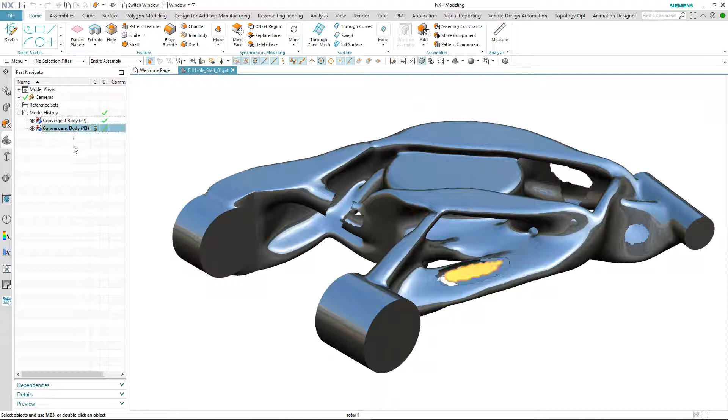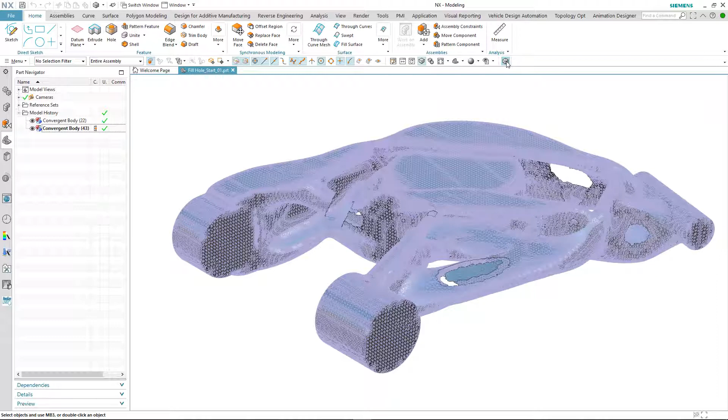In the graphics window we have an imported mesh body that's come in as two separate convergent bodies. We can also take a look at the makeup of the facet geometry by highlighting the facet edges. This visual aid is particularly useful to highlight areas that might require a remesh to improve the mesh quality. In this instance, the mesh density looks decent, so there'll be no need for a remesh. However, you can see we have other issues to resolve, namely to repair the holes.

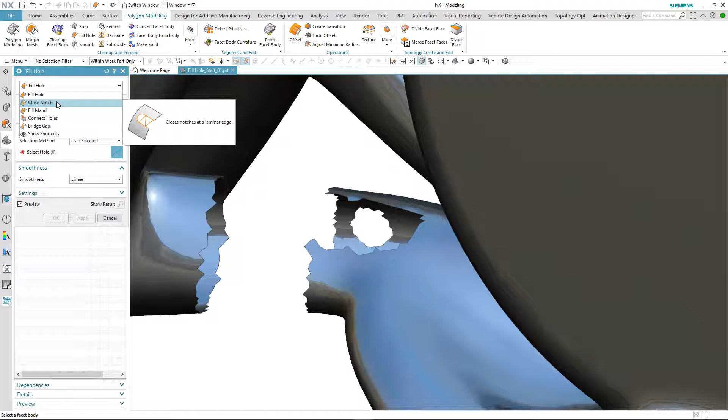Let's take a look at the first hole that we want to fix. You can see that this is a little bit more than a hole, it's an actual gap between two areas of the mesh body. So we're going to use one of the new fill hole options called Close Notch to start the process of repairing. As the name suggests, this new option allows us to fill in a notched hole in our mesh body.

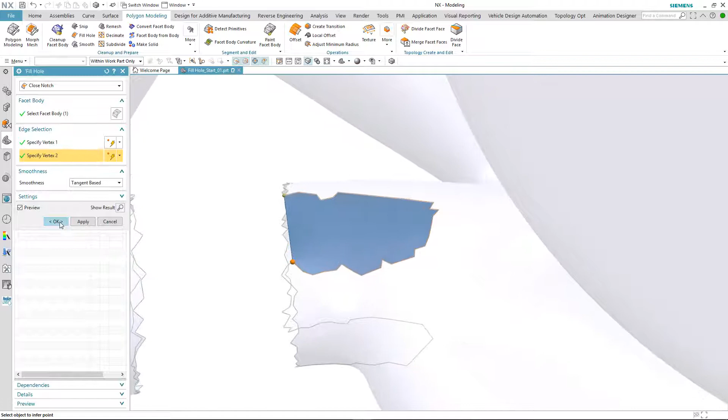The process to fill in this area is simply to select the facet body and then select two points that we want to fill between, and then modify the smoothness. So we'll go from a linear to a tangent transition—very quick and very easy to fill in that area with a quality transition too. As I said, this is the start of the process.

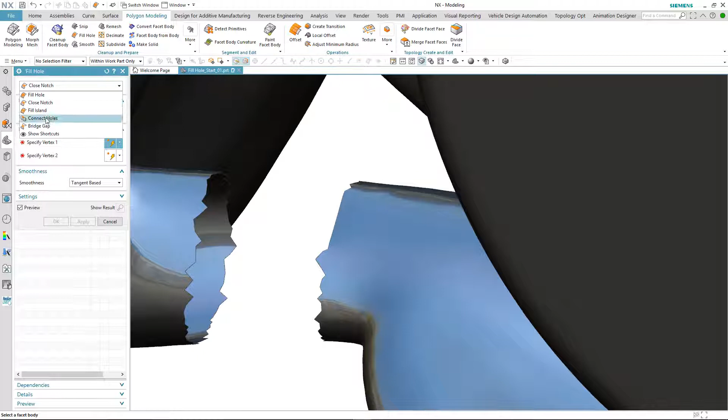Now let's take a look at how we can fill in the area between the two holes. This time we'll use another new option under fill hole, called Connect Holes. Again, we select the facet body, but this time select the two boundaries of the holes that we want to connect. And again, it's as quick as that.

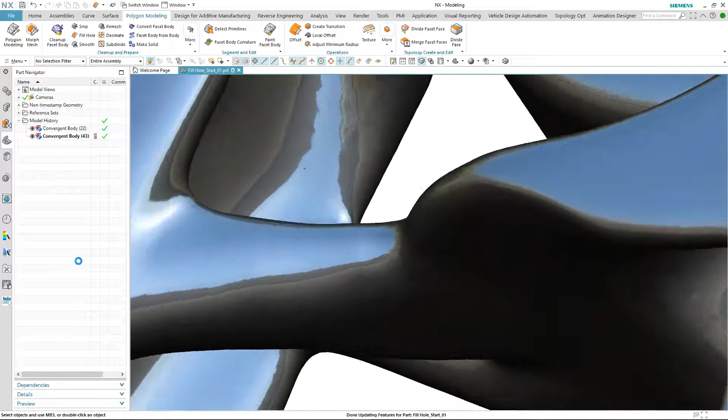Again, we can modify the smoothness. In this case, we want it to be a little fuller, so we change it from a tangent to a curvature transition. And again, you can see how smooth a transition we can get. So using those two new options, it's taken us no time to repair that particular area of the mesh body.

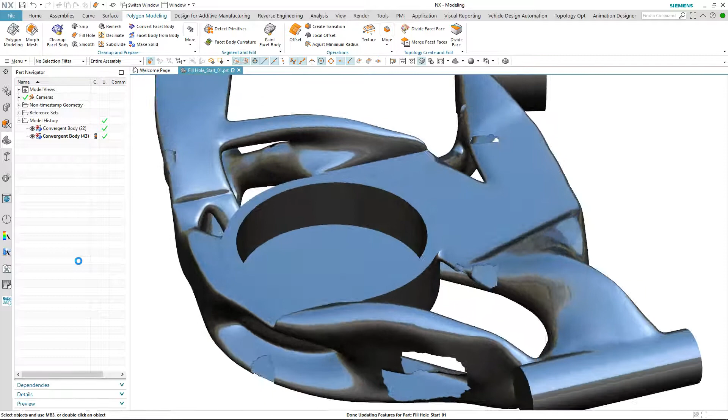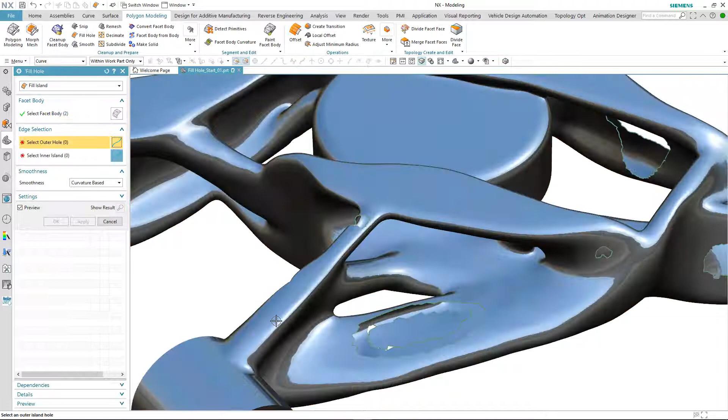Let's move on to the next area of concern. In this case, we're going to take a look at how we can bring together the two separate convergent bodies. To do this, we'll use another one of the options in the fill hole command, this time called Fill Island. The process for repairing this area is that we first select both the convergent bodies, and then we select the boundary of the outer hole and then the boundary of the inner island. As with the previous options, we can control the smoothness between both of the convergent bodies.

So we've completed this repair, and just to get a better idea of how good a quality transition we've got, we'll switch off the facet edges temporarily. You can see how smooth the area is between what was two separate convergent bodies.

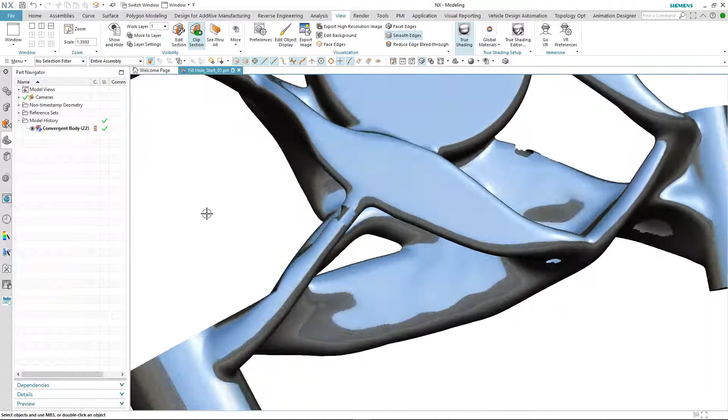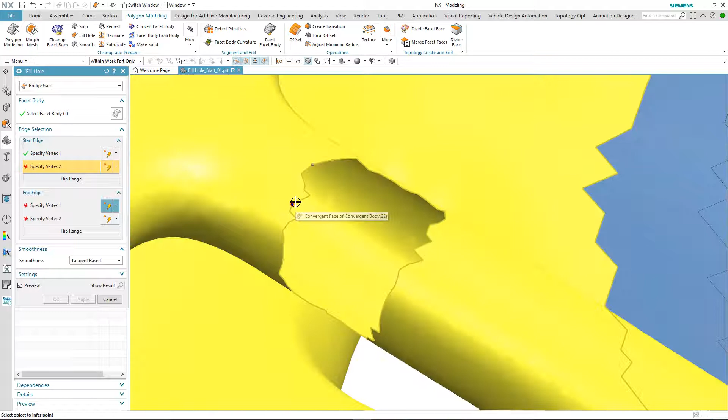I've got two other repair options that I'd like to show you. The first is not a new capability, it's just a new user interaction, which is bridge gap. The way this works now is that we select the facet body and then two vertices on one edge and then two other vertices on the opposite edge, and the gap is filled in between. Again, we have all the control that you've seen in the other repair options.

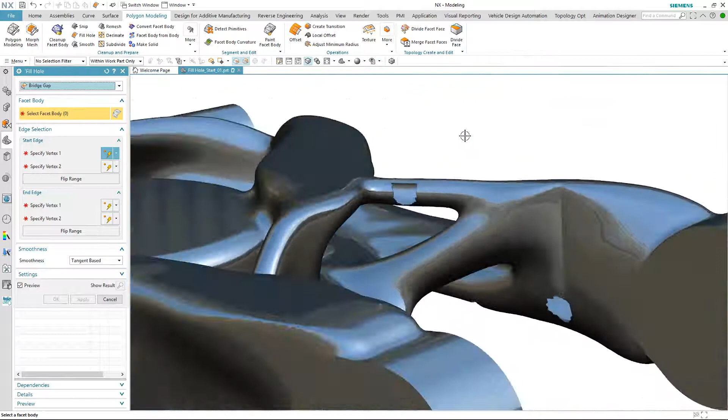The final fill hole enhancement is to do with selection. In this case, we've still got a number of holes that we need to repair. So we select the fill hole option, but this time the selection method is going to be all holes. Notice how all of the remaining holes have been filled with a tangent smoothness.

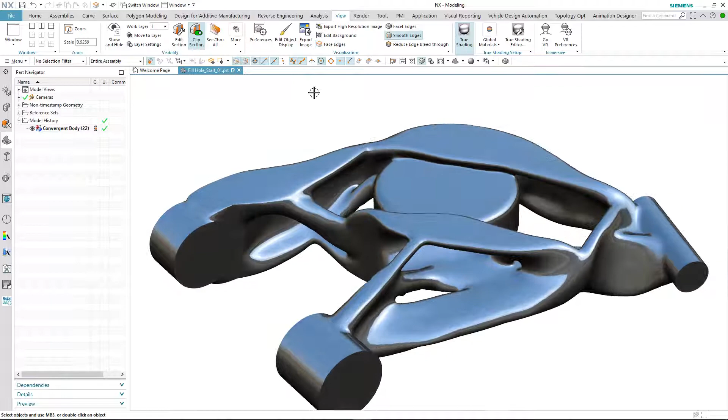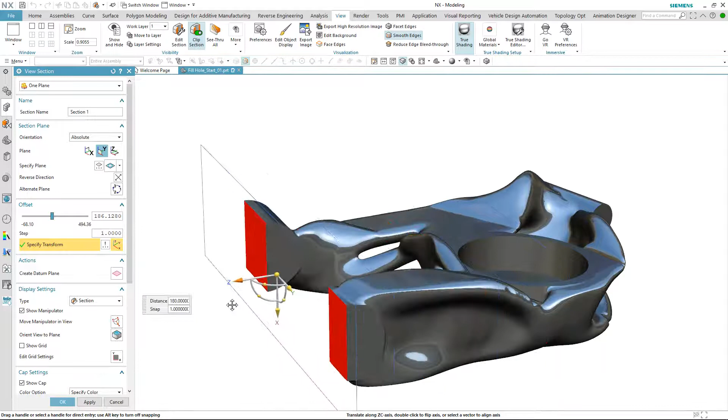Again, if we rotate the body around, we can see now that all of the repairs have been completed, and what was two separate convergent sheet bodies is now one convergent solid body that we can use further downstream, either for manufacturing with 3D printing, or we could send it off to an analysis tool for doing structural tests.

So just to recap, we've looked at a number of new options in this latest release of NX with respect to the fill hole command, a tool that we can use to very quickly repair imported mesh data so that it can be made ready for other downstream design processes or for moving into analysis or manufacture.